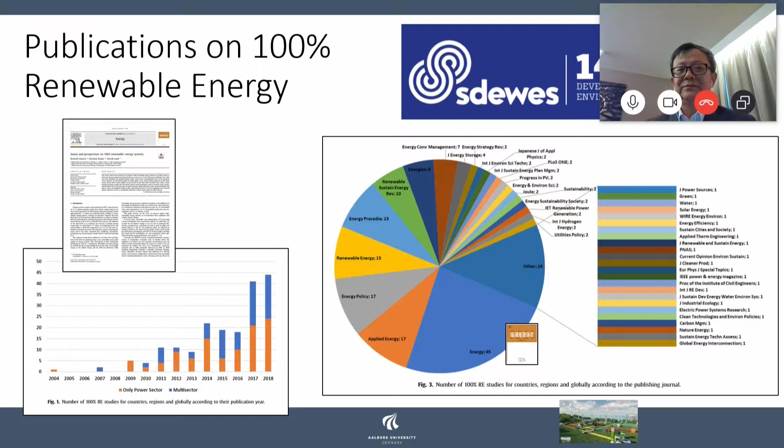Already this morning, Professor Christian Breyer showed some slides for a paper he and I and my colleague Kenneth Hansen did recently, where we documented how the scientific contributions and publications on this topic, 100% renewable energy, are really increasing. I have added one slide to the slides you already showed this morning, and that is the slide that you actually produced and sent to me in the very beginning, and that tells in which journals we find these publications. And the reason why I show it is because I'm extremely proud and happy to say that Energy, the journal that I edit, is among the leading forums for this discussion here. So that's why I show this diagram here.

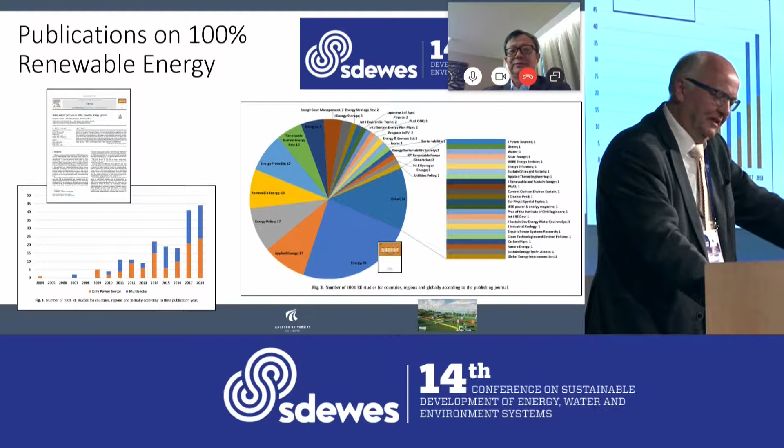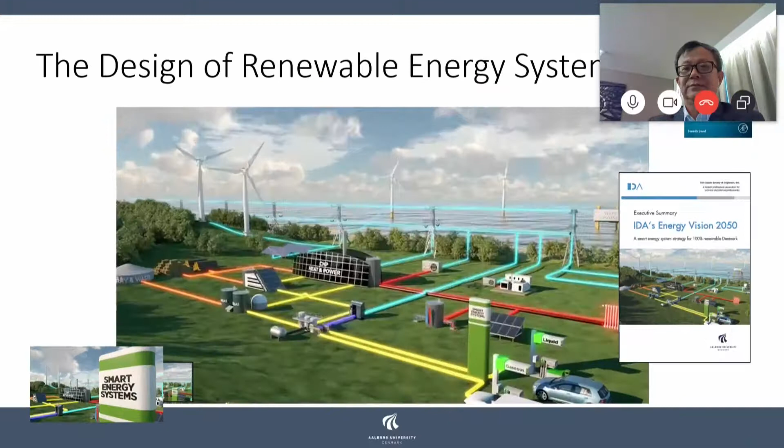As I mentioned, I would like all of you to contribute to the discussion. That could be something about how we should design the 100% renewable energy systems. How much wind should we have? How much PV should we have? How much biomass should we include? Should we rely mostly on hydrogen or electrofuels or electricity storage and so on? We already heard something this morning, but also your contribution on the technologies, what their role is, and how we should design the system. Of course, also contributions on how we should model it. Can we predict the future as scientists? Can we model it? What kind of information can we gain out of energy system analysis modeling?

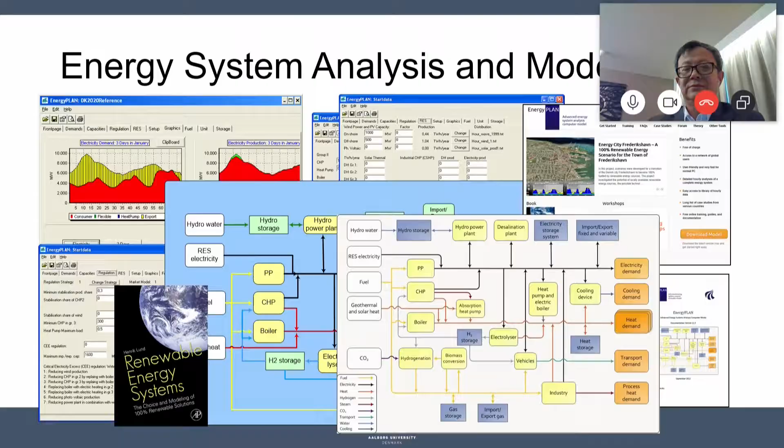Of course, another topic could be, we have addressed the global issue and we'll be around the world here, but even though we look at the global issues, everything has to start in your own building and by yourself and your local community. So how should we connect what we do locally and nationally and regionally, as in Europe, US, and China, and also on the global level? That could also be one of the issues.

We have some very good panelists here. We have 5 panelists, and I will introduce you one by one. And 2 of you are not present in the room today. We hope it'll work with the online thing, this experiment we are trying to carry out here. I will first introduce the first speaker, and this is Professor Xiliang Zhang. Professor Xiliang Zhang is with us online from China. Xi Liang is a professor in economics at the very highly rated Tsinghua University in Beijing, China. He's also the director of the Institute of Energy, Environment and Economy, and also the director of the Tsinghua MIT China Energy and Climate Project.

I have visited Xi Liang in Tsinghua, and I can easily see for myself that Professor Zhang is really a highly graded and very influential energy researcher in China. And also years ago, he served on the IPCC and was a co-author of some of the reports there. So I deeply welcome you, Xi Liang, and let's hear your opening statement. Let's give Professor Xi Liang a hand here.

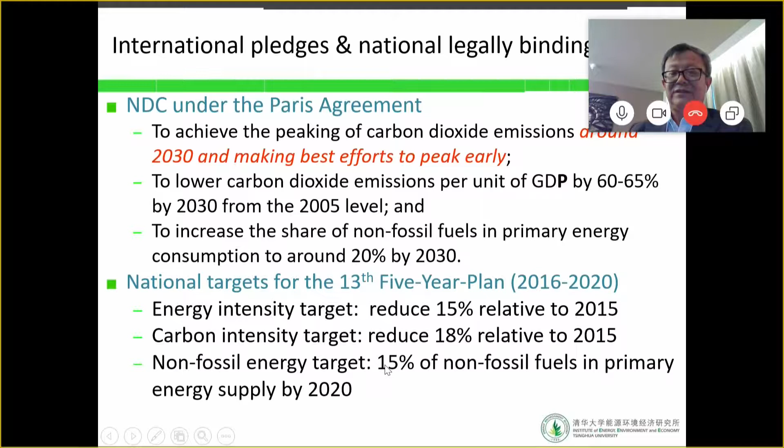I think electrification of energy use is also a very important part to achieve a 100% renewable energy system. Next slide, please. This slide shows the CO2 emissions of China's electricity sector to achieve the 2-degree target. You can see we really need a very deep decline immediately after the year 2020 to safeguard the 2-degree target.

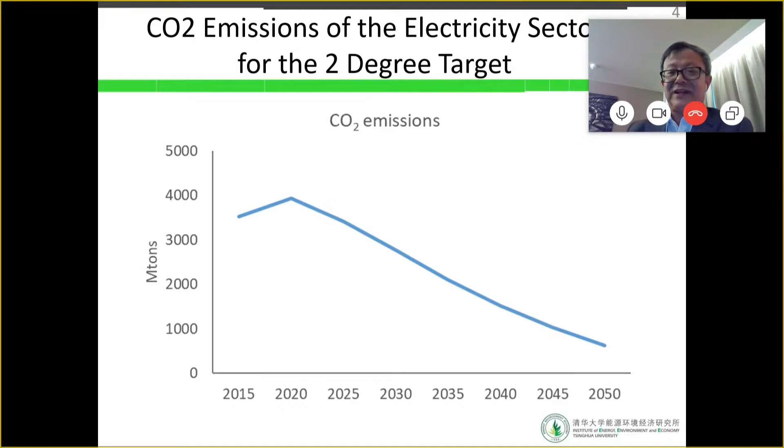The next slide. This slide presents the installed capacity of electricity generation in the future. From this slide, you can see that currently in terms of generation capacity, coal is about 60%, and still dominates Chinese electricity generation.

But in the future, after the year 2020, the increased installed capacity of electricity generation will primarily come from renewables, wind, solar, and also nuclear. We can also see that even the existing stock of coal electricity will be substituted by renewables and natural gas, and we also need to introduce more CCS in the power generation sector.

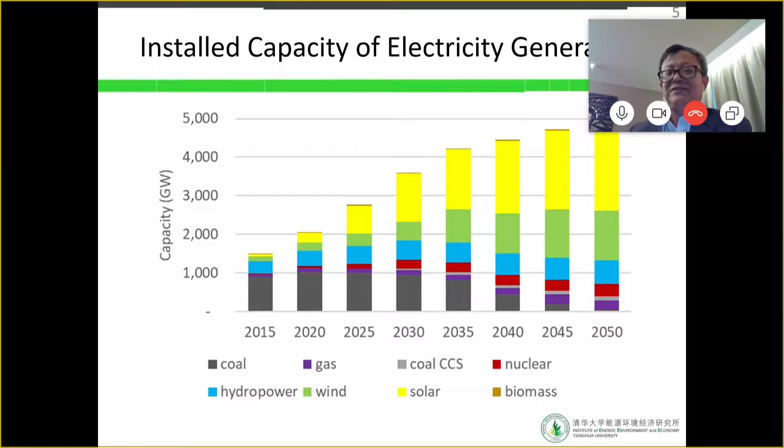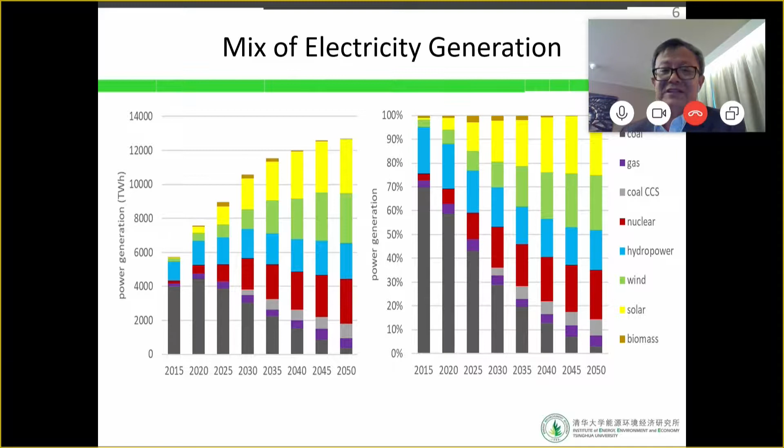The next slide, please. So you can see here, this slide highlights the key technological and policy measures China needs to take to achieve the decarbonization of the electricity system. So first, we need to improve the system flexibility right now, and start to improve the flexibility of the coal-fired plants. And we also need to encourage the development and deployment of flexible power plants and storage, such as natural gas power plants, and increase the capacity of storage.

We also need to enhance the interconnection of the power grids, because China is a big nation, and the renewable resources in the western part of China are more abundant compared to the eastern part of China. So we also need to encourage the development of demand response.

At the same time, we also need to address the system reliability issues, and we also need to improve renewable forecasting. We also need to consider the integration of the renewable electricity system with other energy systems, such as the heat system. I think the heat system is also a very key part of achieving the 100% renewable energy system. Of course, we need to promote storage and backup units. So this is the primary technological measures we need to adopt.

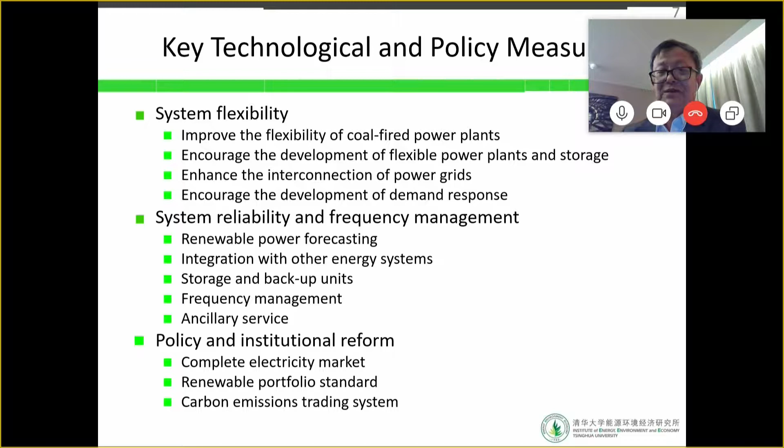Hello? Thank you very much. Not every word was clear and loud, but thank you very much for presenting it. And it was indeed encouraging for all of us to see the diagrams, and to see such diagrams for a big country such as China, because it's so important that you also participate in this combat against carbon dioxide emission. So thank you very much. I think we should give a hand.

Stay on if you can, and I'll try to introduce. Sorry, I need the microphone here.

I will introduce the next speaker, and the next speaker will also be online, but he's tape recorded, so we should have a more direct sound. The next speaker is Mark Jacobson, who's a professor in Civil and Environmental Engineering at Stanford University in California, US. He's also at that university the director of the Energy Program and co-founder of the 100% Clean Renewable Energy Movement. Mark has served on several boards and committees. Among others, in 2013, he served on the Energy Efficiency and Renewable Energy Advisory Board to the US Secretary of Energy. And he's been promoting very strongly the concept of 100% renewable energy for many years.

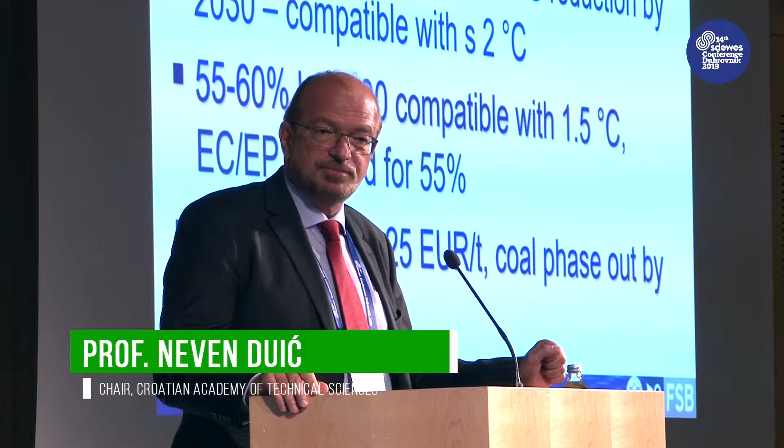When in 2008, European Union has set up goals for reducing greenhouse gas emissions for 20% by 2020, I thought that was radical. But Europe did it without much problems. So we have new goals, 40% reduction by 2030, it's official. 32% renewables in energy mix by 2030 and 32.5% energy efficiency. But actually, if you calculate just these renewables and energy efficiency, it's actually 45% reduction. And this 45% reduction is compatible with 2 degrees.

But we have signed Paris Agreement and we have to now go to 1.5 degrees. And that means 55 to 60% reduction of greenhouse gas emissions by 2030. European Commission has suggested and European Parliament has voted for 55% reduction, and we will probably see in the next few months that the Council will also agree on that reduction.

Also, we have an increase of price of CO2 emissions to 25 euros per ton, which is already more or less enough to kill coal. We have seen the reduction of coal last year for 18%, so that one has been solved out of 3 fossil fuels.

If we look at 2050, 80% reduction of GHG is compatible with 2 degrees, while if we want to be compatible with 1.5 degree, we have to become climate neutral fully, which means 95% reduction of GHG. That means no fossil fuels, basically, because we also have some emissions in agriculture, which we cannot avoid so easily.

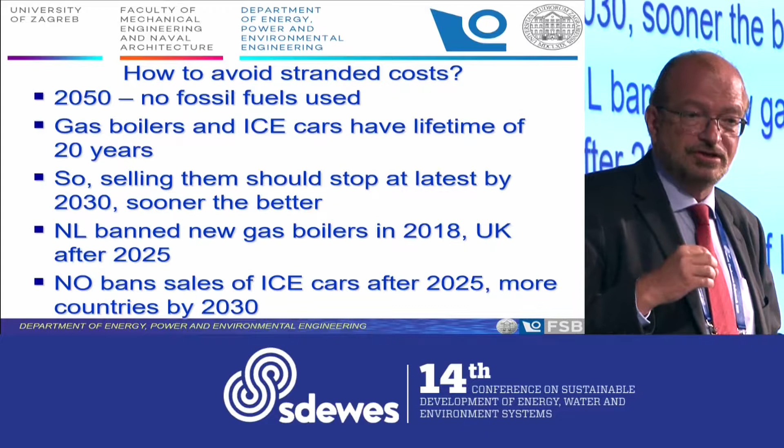So we have to think about how to reduce the stranded costs. Otherwise, people will be buying obsolete equipment, which they will have to abandon before the end of lifetime. This is an important thing that we want to avoid, people having stranded costs and also companies having stranded costs. So which way to go?

What we heard from Christian, solar is going to be so cheap that it will be the main source of energy. I would say also wind and solar will be so cheap that they will make most of new capacity. They already make around 60% of newly built capacity on the global level. That will create quite a lot of excess of electricity in some moments, or the price of electricity will go down relatively low.

First thing that happens if you have cheap electricity, you use it for heating. What is the exergy of electricity that you cannot use for better purposes? You convert it to heat. So we have basically 3 choices which are offered how to solve heating. One is district heating with power to heat, plus heat pumps with heat storage where district heating is not feasible. Or we can go hydrogen, or we can go renewable gas, biomethane and e-methane. I will later show how this compares on transport, because in transport we have similar options, electricity, hydrogen, or e-fuels.

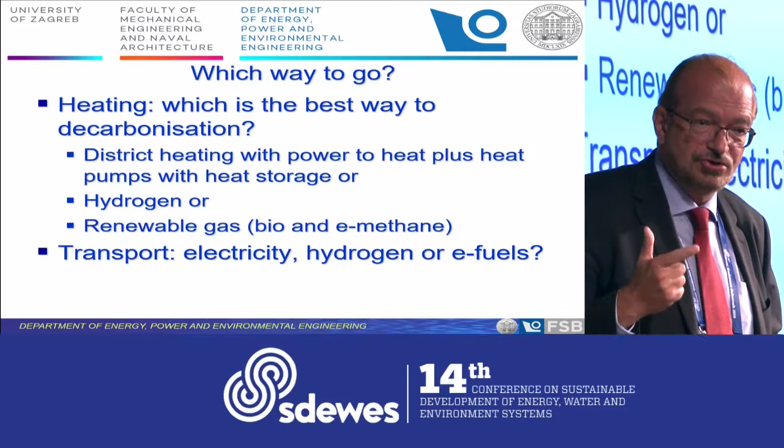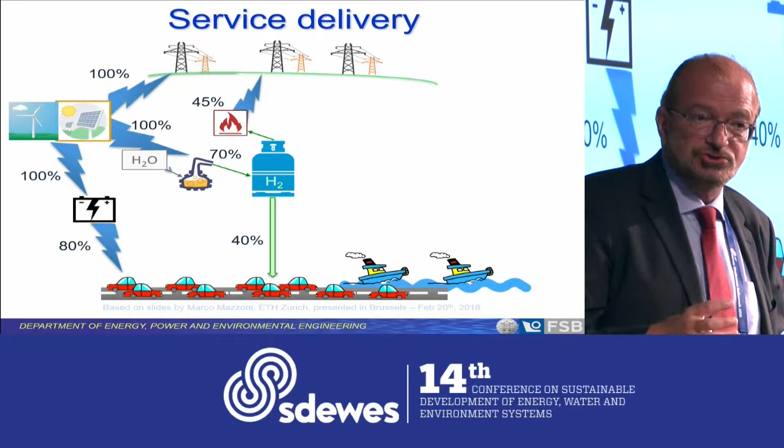So let's look at the services we have to satisfy. Let's say transport and electricity, which will also be used for heating. We have wind and solar energy in huge amounts, and in some hours excess. If we use it directly, it is very efficient. If we produce hydrogen instead, we lose 30% already on the hydrogen production side. And then if we power vehicles with that electricity going through hydrogen, we have only 40% efficiency instead of 80% efficiency. If we produce electricity by hydrogen, it's 45% efficiency.

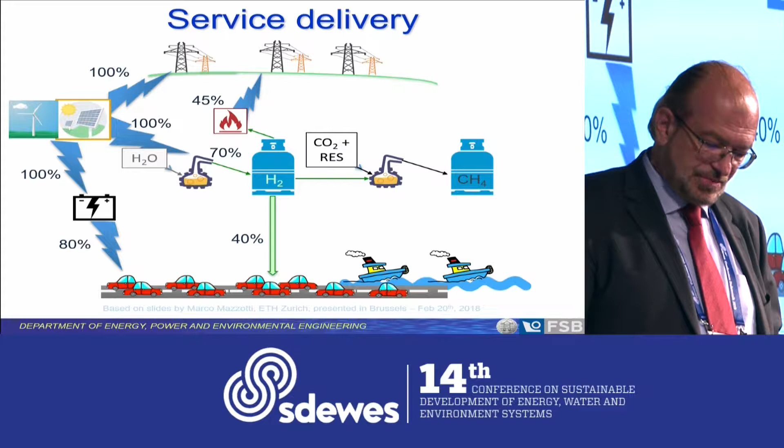If we use this hydrogen to hydrogenize CO2, which we have to capture from somewhere, we lose even more, and our efficiency falls down to 15% when powering cars, or to 35% when producing electricity. So, does it make sense actually to do it?

Look at how much renewable electricity we have today in the EU, 2.5 petawatt hours. We would need 24 petawatt hours to power transport using carbon capture and utilization. But if we power it directly with electricity, it's only 4.5. It is, of course, possible to go through e-methane or e-fuels, but we would actually need 7 times more primary energy to do that. So it doesn't make sense, because we want to reduce the amount of primary energy as much as possible.

So that's why we go to electricity when it's feasible, and then we use hydrogen only in those places where it's not feasible, and that is in some industry and maybe for some balancing of the energy system, and for some heavy transport we're going to need carbon-based fuel because they need high energy density of fuels. And with this, I would like to end with my introductory talk. Thank you.

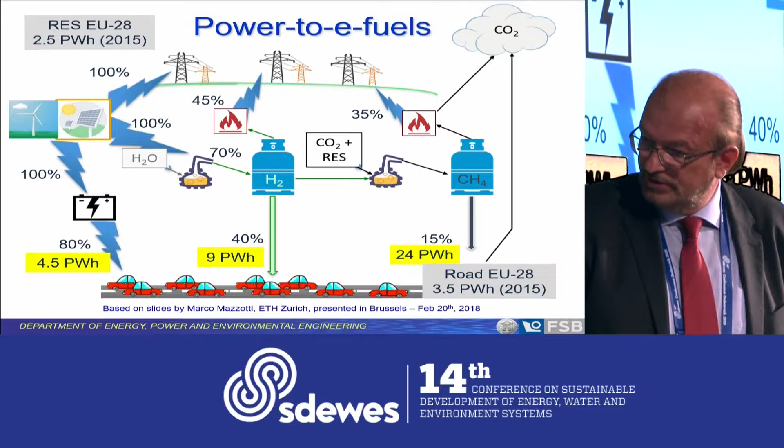Thank you very much for this. And from this, being in China, US, Europe, we now turn our head to the next speaker, and that is Professor Natasha Markovska, professor of the Research Center of Energy of the Macedonian Academy of Science. You have also been a member of various European program committees, so I know you can easily cover not only Macedonia but also Europe, but we invited you because you actually served at the IPCC panel for quite a number of years, since 2003,

as far as I have been able to look up. That's quite a number of years, so we know you have been quite influential in that and also have a lot of knowledge from there to share. So now we lift the whole thing to the United Nations level. Please welcome Natasha Markovska.

So, good evening. The views from UNFCCC Science. Many things were said today from Christian, but I would like to also elaborate a little bit more how UNFCCC or UN looks into the energy transition and how they plan to do that.

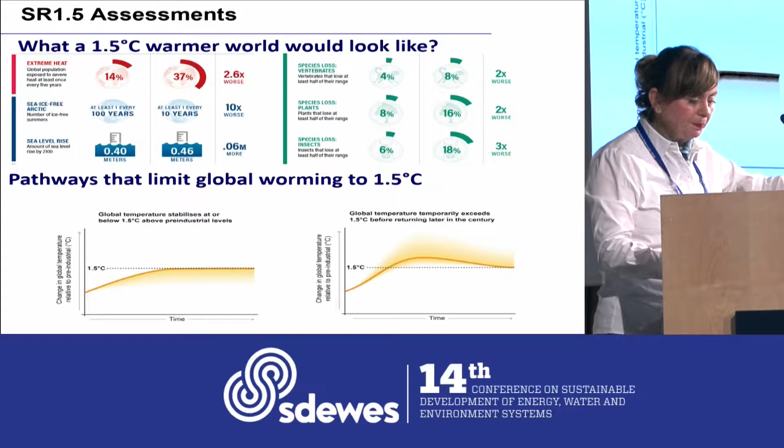These pathways differ in many ways. They reflect different futures and differ in what kind of trade-offs and benefits with regards to other world priorities on the agenda, like sustainable development goals, poverty reduction. But all of them have a number of common features. And many times mentioned today is that by 2030 we have to halve the emissions, and by mid-century CO2 emissions have to fall to net zero.

And all of the pathways include renewables supplying 70% to 85% of electricity, and unabated coal use being largely phased out. Also, one of the common features of 1.5 degrees pathways is that they depend heavily on utilization of carbon dioxide removal, in the order of 100 to 1,000 gigatons CO2 equivalent over the 21st century.

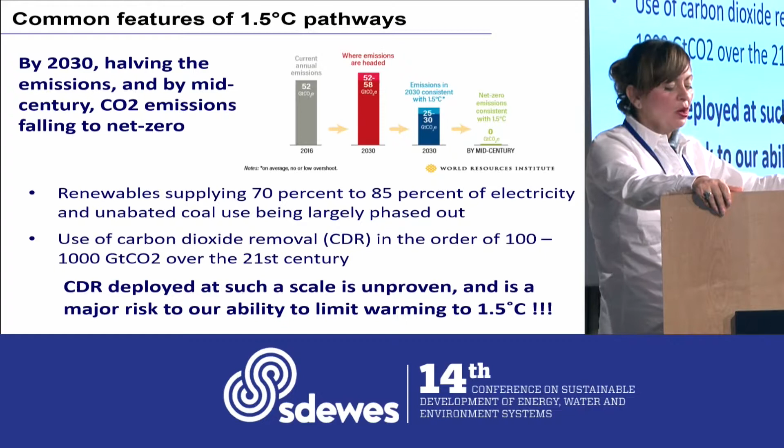But it is correctly noted in the report that CDR deployed at such a scale is unproven and in fact poses a major risk to our ability to limit global warming to 1.5 degrees. Christian mentioned today that 100% renewable energy systems were for the very first time mentioned in this report.

And this report indeed acknowledges the growing body of relevant scientific literature, which goes beyond the wide range of integrated assessment model projections of the share of renewables in their 1.5 and 2 degrees pathways. And also, in this report, we have updated representation of renewable energy resource potential, technology costs, and system integration since the fifth assessment report of IPCC, which resulted in a higher deployment of renewable energy sources in many cases.

But, there is a big but, none of the integrated assessment model projections identify 100% renewable energy solutions for the global energy systems as a part of cost-effective mitigation pathways. And the question is now, will the SDEWES science shed a different light on the role of 100% renewable energy systems in 1.5 degree pathways?

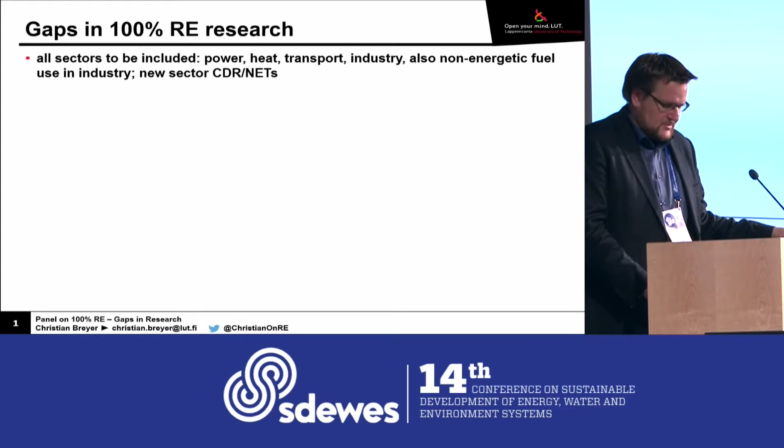The industry sector in general and also the transport sector beyond the road transport needs to be more investigated. If you look into the papers, then for example international marine, international flights, they're very often missing. But there we have one of the harder to abate parts because we need dense chemical fuels, whether it's biofuels, whether it's electrofuels, synthetic fuels, however we call it, but we need a solution there.

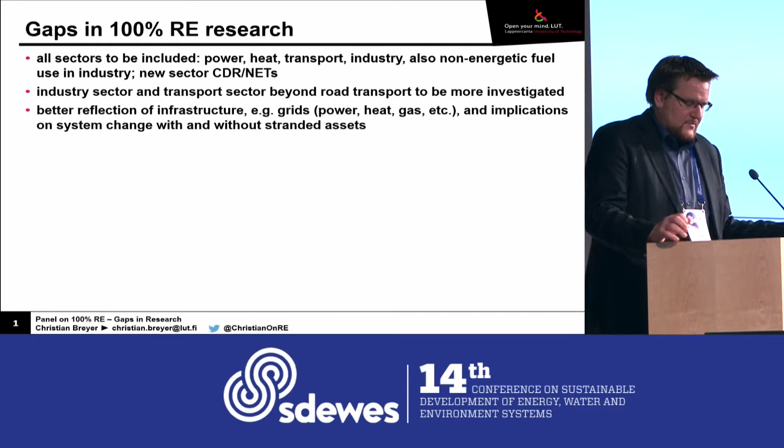Of course, we have to better reflect the infrastructure when it comes to grids, whether we talk on power grids, heat grids, gas grids, whether we have transmission systems, whether we have distribution systems, and of course the implications on system change with and without stranded assets. Because we can well imagine if there is no major adjustment for a natural gas grid, and suddenly we realize there is methane leakage with a huge global warming potential, then maybe within a few years of time such an infrastructure is simply stopped because we cannot accept it anymore. So these are things I think we have to go a bit deeper.

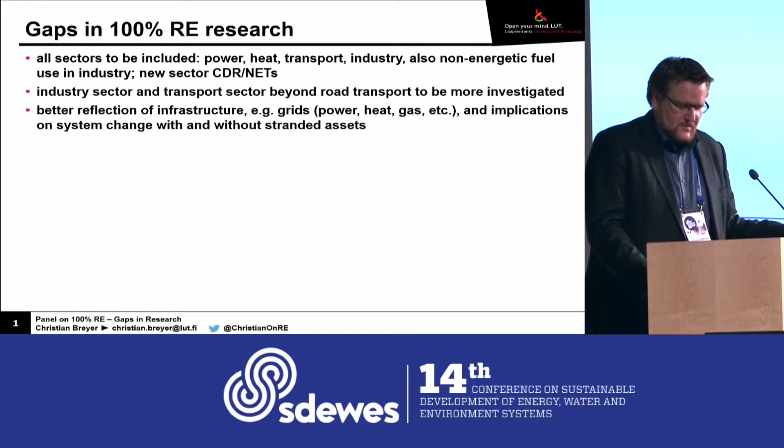And then of course we have so-called overnight scenarios. That means in 1 second at midnight we go from nothing on a greenfield approach to a fully 100% renewable system. This is very helpful to get a kind of indicative choice where we should head to. But in the very end we need transition scenarios because they help us to describe more a kind of investment lock-in. Because if we talk on technologies, we heard just before with cars, we use them 20 years, and 20 years is already a short period of time compared to coal-fired power plants. There we talk on 40, 50 years. So we can have a very long lock-in of existing investments.

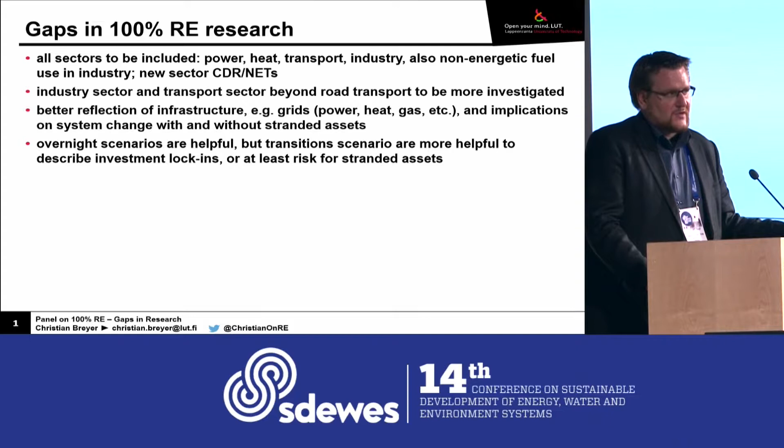Of course, we could always say, okay, sorry, if society cannot take it anymore, then we have stranded assets. Of course, we know that exists, and that is a real threat. But of course, this can also cause major disruptions and of course, strong lobbying pressure not to have it as stranded assets. So that requires then even more tough policies, and at least as scientists, we should have it on the radar screen and describe it with our models.

What was already mentioned, we need a better geographic coverage in high resolution. So at least from the papers published in journals, Europe is understood the best because half of all articles are about Europe or different countries in Europe. US and Australia is understood well, I would say, but sometimes only for the power sector. I think US for all energy sectors, but still more on the power sector. Australia, if I remember right, it's only the power sector, so it goes not yet beyond.

However, when it comes to regions in Africa, Latin America, Middle East, South Africa, South Asia, East Asia, whether it's Northeast, Southeast, we simply lack papers. And of course, I even remember discussions then with journals or editors in journals: is it just a new consulting piece if we have a new country which was never done before?

This is of course then a question from a scientific point of view. If the model is not really new, but we have new data for a new country, is it scientific or is it consultancy? Of course, this is something we have to discuss. From my point of view, it's more scientific. It was never done before for such a country.

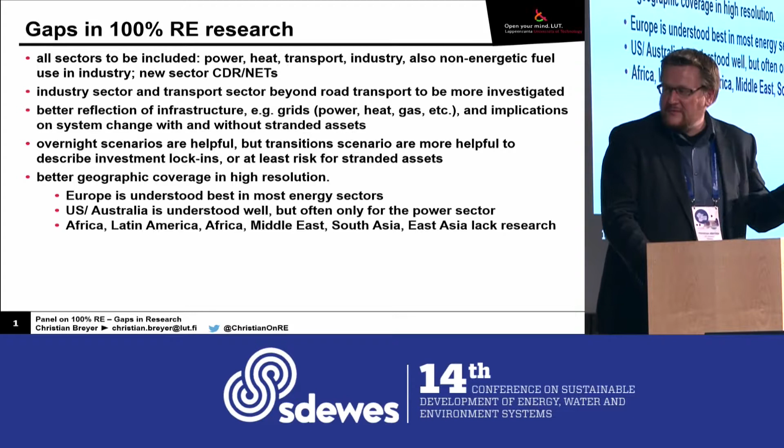Because if we have then the 150th paper for Europe with a small piece of change in methods, is it really something that is really novel compared to having an old method but for a country which was never investigated before? And of course, many stakeholders take it up in the very end and then discuss such results.

Next point is investigation of key cost assumptions, in particular for the core technologies. So I think wind is not so much debated, but when it comes to solar photovoltaics, batteries, electrolyzers, we should really make sure that we have really good cost assumptions in these models. Because IPCC with the integrated assessment models is a good example or a poor example. If you have completely outdated numbers in the models, we should not be surprised if the model concludes it's not relevant. So all this has to be investigated very well.

And of course, we should never forget flexibility is key. We do not talk about only 100% renewables or more grid interconnection or more storage. In the end, from a more abstract point of view, we have to talk about flexibility. And that has to be studied in all different regards. And of course, sometimes they are in competition. Very often they are complementary.

But in the end, we talk on supply response. Also, that is possible. Just think of hydro dams, bioenergy. Of course, demand response. This is discussed quite a lot. But of course, it's the question where we have the most relevant demand response, also in volume, in value. Then grids, already mentioned earlier. Of course, sector coupling is very important, and storage. But we have all those flexibility options.

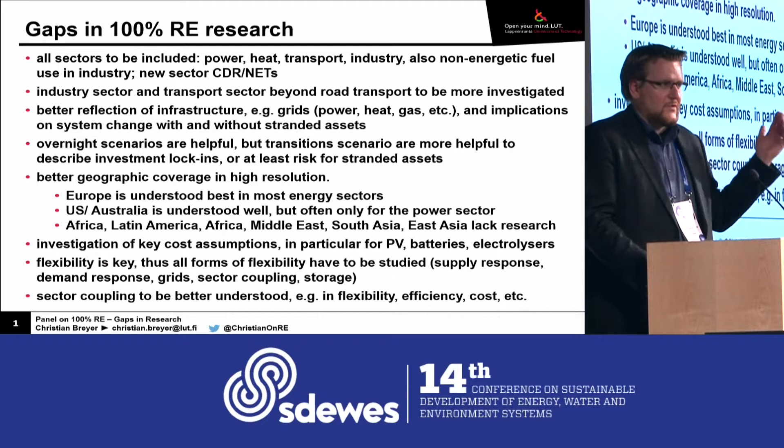And I guess at least the hourly resolved models are not so bad, and we can capture most of them, but we should make sure that they're all there. And of course, sector coupling has to be really better understood when it comes to flexibility, efficiency, cost. But I find it also quite interesting: the better you optimize it, the deeper you go, the less curtailment you really find. And power to heat is a good example that it can then later be used in district heating, maybe only for 100, 200 hours a year, but it already pays off for good cases.

This is then the second slide, which is a bit broader perspective. If you have a really good global 100% renewable energy system model running, then suddenly you come to the question, and there is not yet a single answer, but the research question is there: what about international power-to-X trade? So fuels, chemicals, material refining.

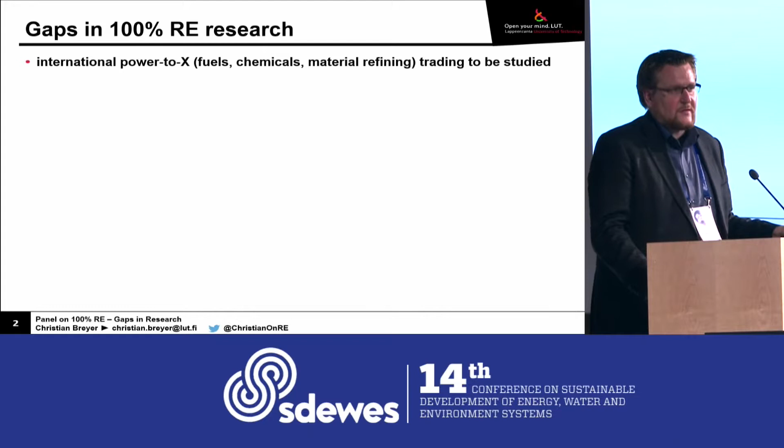In most models, it's then done domestically, but if the resources are in South Morocco, the best for solar and wind on the same site on the planet, why should one not have really large-scale synthetic fuel or metal refining capacities there, as we have them today in Iceland or Norway, for the same reasons, by the way. So this should be better understood. What is the trade-off of lower supply for some regions, economic benefits in other regions? What is the impact on energy security? I guess a lot of research has to be done there.

Something which is very important, and I'm very happy that Tobias is here in the room. We have a common paper on that currently under review. Material resource availability research requires much more emphasis. So suddenly we now have several teams able to do 100% renewable scenarios for the world. But in the end the question is, do we have all the lithium for all these batteries? Good question. We do not really know.

So, depending on scenarios, do we have all the neodymium, dysprosium for all these electric engines or all these wind turbines? So these are questions we have to go deeper, and we have to check for all of the materials. For some of the materials, we can already give green light, seems to be okay. For other technologies, materials, at least I would say it's not yet so obvious.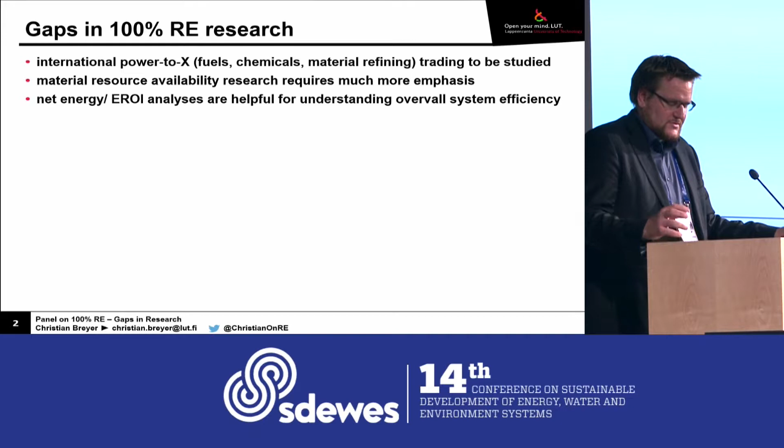There are a few papers on net energy, energy return on energy investment analysis. Of course, they're also helpful to understand the overall system efficiency. I guess we can really do more there. There's only 2-3 teams doing that on a system level.

Energy system models have to cover all energy sectors, already mentioned before, fuel use plus, and I think this is important, CO2 management, and then of course also CDR, so CO2 carbon removal, and negative emission technologies. And this is important that the highly resolved hourly running energy system models can do that, because then we can compare that really to the integrated assessment models, because it's not okay from a perspective of energy system models to complain integrated assessment models cannot do or reproduce this or that. In the end, energy system models have to deliver. And then we can question and ask why we have different results, then we can compare.

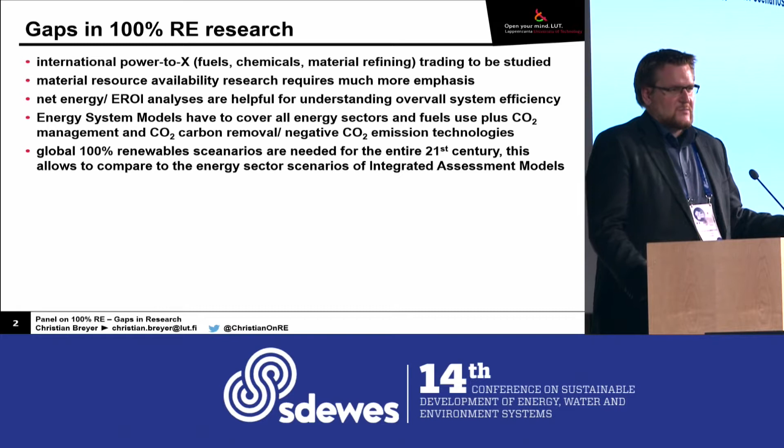So in the very end, global 100% renewable scenarios are needed for the full 21st century, because this is the range where integrated assessment models are done. And then we can really compare the energy sector scenarios of integrated assessment models to much higher resolved energy system models. I just mentioned today, we run a model with 145 regions. Integrated assessment models have 20 regions. Even that, for sure, will have some implications.

And then, of course, we could combine both model types, because integrated assessment models are outstanding, great to describe the exchange of the energy system with all other sectors, in particular ecosystems all around with oceans, atmosphere, cryosphere, so all these systems. That's great. And this is, of course, an input which is needed by energy system models. However, the energy sector, from my point of view, can be modeled much, much better in energy system models. Some integrated assessment models do it with annual energy balancing. That doesn't make sense in a system with very high shares of solar and wind.

Yeah, then, of course, we have to ask some questions. The question is why the International Energy Agency, or IPCC, have obviously an institutional bias against 100% renewables. So obviously, it's not so super complicated in an integrated assessment model just to have a model run with 100% renewables, but not a single one is existing. Why? It's a simple question. Maybe there is no answer, I don't know, but we should ask more.

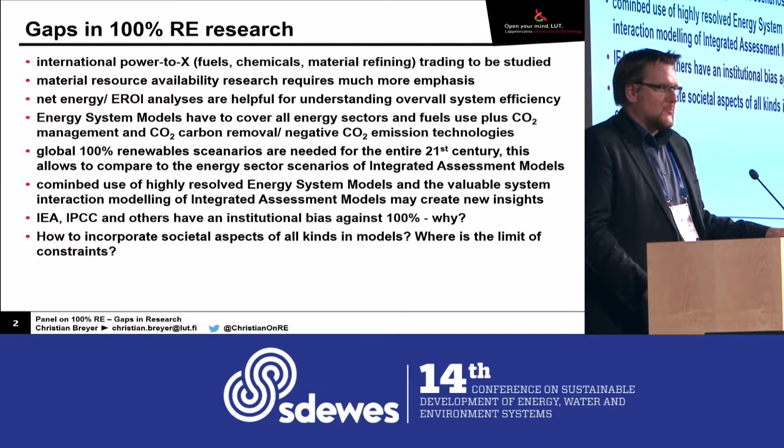Maybe then something changes. And of course, where we are all rather weak, whether it's integrated assessment models or energy system models, is how to incorporate societal aspects of all kinds in the models. So we try to build that in with some constraints here, area availability there, phase in, phase out functions and different assumptions, but how to really reflect the will of society and societal constraints really well in the model, because in the end we all should have the attempt to be closer to reality, what really happens.

Last but not least, how to project discount factors. So it was quite nice. I had today in the morning a slide on this Nature Communications paper on 100% renewables for the power sector. Then we got a rebuttal: but you have uniform cost of capital of 7% for all countries for all years. This is nonsense. I said, okay, yeah, sure, maybe, but do you have a better method? Oh, no, we don't have a better method. Okay, they had a suggestion, but it does not make much more sense. But of course, it brings us to the inner core of the question when we describe models for several decades, how to project cost of capital.

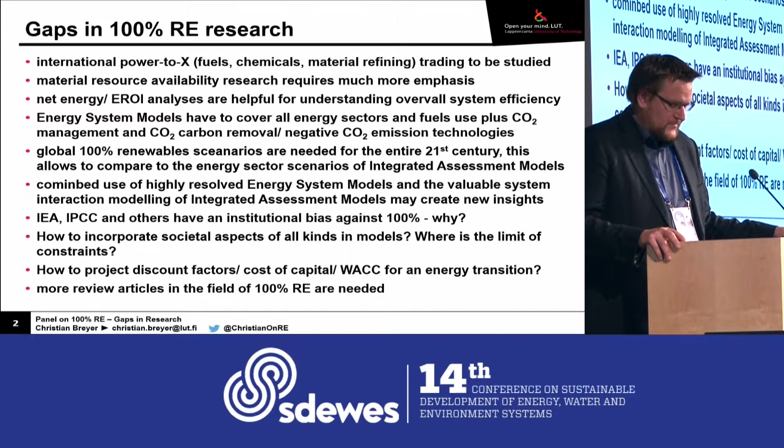That's really important. And the very last one, we do not have too many review articles in the field, so we need more. And then we have a better understanding what we all together are doing there.